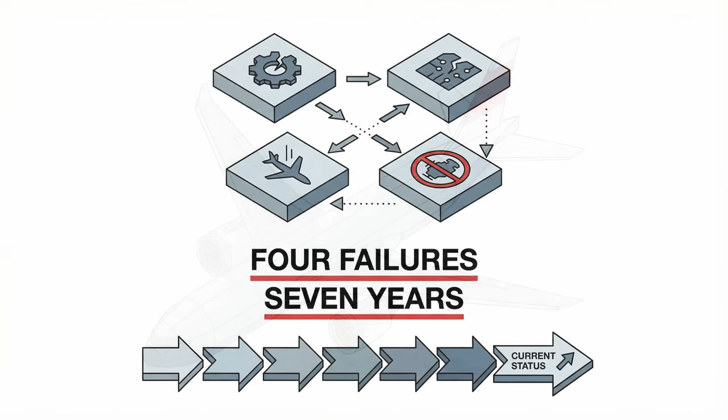Boeing told investors on January 27th that the company just posted a $2 billion annual profit, first time they've been in the black since before the pandemic. Their order backlog hit $682 billion, an all-time record. Kelly Ortberg, the new CEO who took over during Boeing's darkest days, is painting a picture of recovery.

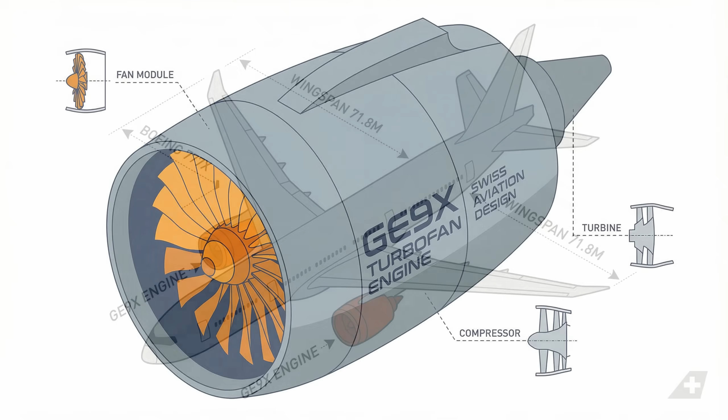Then he gets to the 777X. And you can hear the careful phrasing, the lawyer-approved language that tells you something's wrong before he even finishes the sentence. Quote: 'We have identified a potential durability issue during a recent inspection on the 777-9 engine, and we're working with GE to better understand that issue and finalize root cause and corrective action.' End quote. Potential durability issue.

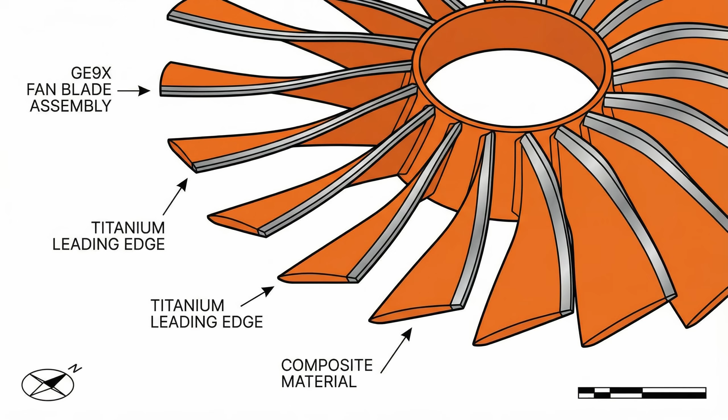That's corporate speak for something broke and we don't know if it's going to keep breaking. According to Flight Global's reporting, this happened during what's called a borescope inspection, essentially sliding a camera through access ports into the running guts of the engine to look for cracks, wear, or metallurgical changes that shouldn't be there. The FAA requires these inspections at specific intervals during certification testing, and this particular engine had racked up significant hours pushing the aircraft through Phase 3 of type inspection authorization.

But Boeing's carefully chosen words are hiding something bigger. Boeing and GE won't specify whether it's the fan blades, the compressor stages, or the turbine section, just a durability issue. GE's official statement reads like damage control: 'We have an on-wing inspection program in place to support Boeing while we analyze the issue and define the corrective action, guided by our safety and quality systems.'

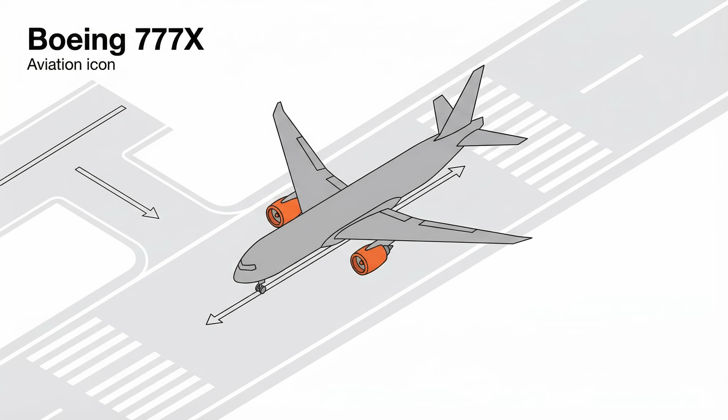This matters because the 777X was supposed to enter service in 2020. That slipped to 2021, then 2023, then 2025, and as of October 2025, Boeing had committed to 2027 deliveries. This latest engine issue doesn't officially delay that timeline. Ortberg insists they're still on track.

But Emirates President Tim Clark, whose airline has 205 of these jets on order, isn't buying it. Clark told Aviation Week he's a little bit miffed that he learned about the delay from a public earnings call rather than a phone call from Boeing. His quote cuts through the corporate spin: 'When they said they pushed it to 2027, that's a 12-month period, am I looking at the first quarter? Second quarter? Third quarter? Fourth quarter? They don't know. They honestly don't.'

And Clark has good reason to be skeptical, because this engine has a history. But here's the part Boeing didn't mention on that earnings call: this isn't the first time the GE9X has had a durability problem. It's not even the second or third. Since development began in 2013, this engine has suffered 4 separate major technical failures.

And when you line them up chronologically, you see something Boeing and GE don't want you to see. Each failure happened after the previous one was supposedly fixed robustly, which means either the world's best aerospace engineers keep missing something fundamental, or this technology is being pushed beyond what current materials science can actually handle.

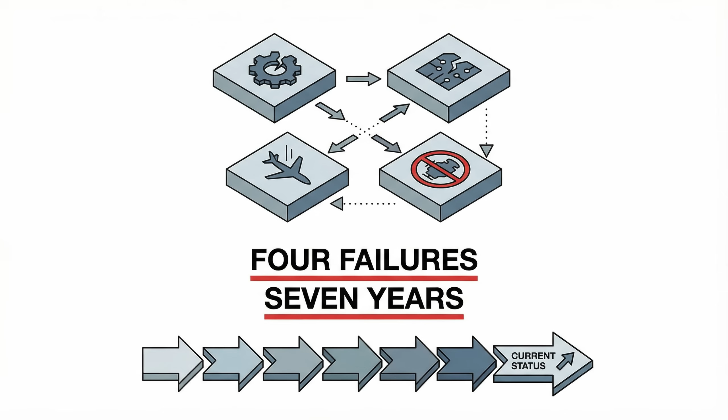The first crisis hit in 2018 and 2019, before the aircraft ever flew. Engineers testing the high-pressure compressor, the section that squeezes incoming air to 50 times atmospheric pressure before combustion, started seeing cracks in the variable stator vanes. These are the adjustable airfoils that control airflow angle into each compressor stage, and they're actuated by lever arms connected to a unison ring that rotates to change their pitch. Under extreme testing conditions, those lever arms started cracking.

The components were deteriorating faster than the engineers had predicted, causing exhaust gas temperatures to spike outside acceptable operating ranges. GE9X program manager Ted Ingling later told reporters, quote, 'It is solved. It is fixed robustly. It is better to have found it in the factory than find it in the field.' That fix pushed the GE9X's first flight from February to March 2018 and delayed the 777X inaugural flight from mid-2019 to January 2020.

But it was caught in testing, corrected with redesigned parts, and the program moved forward. That should have been the lesson learned. It wasn't.

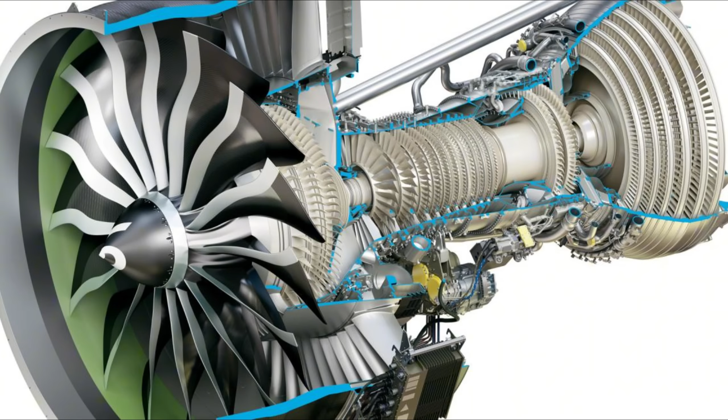Fast forward to October 2022. The 777X test fleet is conducting flights between Seattle and Moses Lake, accumulating hours for certification. Aircraft November 779 X-ray Whiskey lands after a routine sortie, and during post-flight inspection, Boeing technicians noticed something unusual during a borescope check. The engine in question had logged over 1,700 flight hours and 2,600 pressurization cycles, high time for a test engine, but well within expected durability targets.

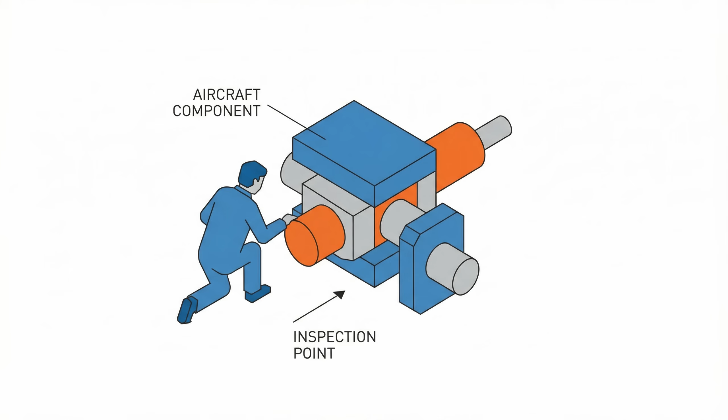Boeing shipped the engine to GE's Peebles, Ohio facility for teardown and additional runs on the test stand. During one of those runs, a temperature sensor triggered an automatic shutdown. The exact cause was never publicly disclosed, but the entire 777X test fleet was grounded for 2 months while engineers inspected every engine and implemented corrective actions. The troubling part? This happened 2 years after the GE9X had received FAA type certification in September 2020.

But what happened in August 2024 made those earlier problems look minor. Aircraft Whiskey Hotel 003 had just completed a 5-hour 31-minute flight from Kona, Hawaii, a long-range ETOPS proving run testing the aircraft's ability to fly extended over water routes. Standard procedure after these flights calls for detailed inspection of all engine mounts and structural attach points.

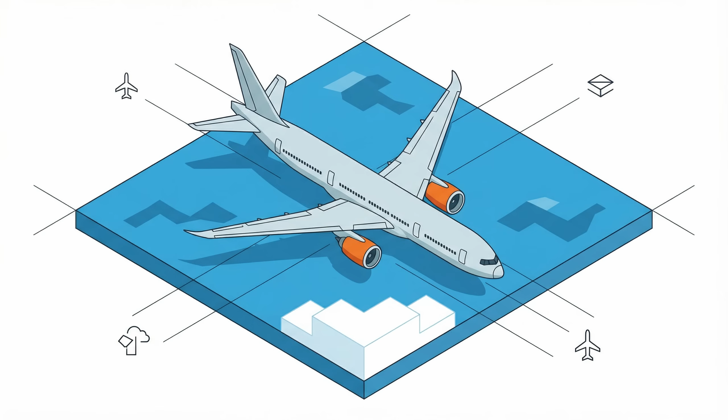What they found was catastrophic. The thrust link, a 13-foot titanium structural beam that transfers all engine thrust loads into the wing box, had completely severed. This isn't a GE engine component. It's part of Boeing's pylon design, the structure that hangs the engine off the wing.

When engineers inspected the other test aircraft, they found cracks propagating on multiple thrust links across the fleet. The 777X was grounded for 5 months. Boeing's investigation determined that vibration-induced stress concentration at the forward engine attach bolt was exceeding design limits. The fix required redesigning the bolt itself and modifying the surrounding pylon structure to redistribute loads.

It's the kind of fundamental structural issue that should have been caught in finite element analysis and ground testing years earlier.

To understand why these repeated failures are so damaging, you need to understand what Boeing promised back in 2013. The 777X launched at the Dubai Air Show with 259 orders worth $95 billion, the largest commercial aircraft launch by dollar value in aviation history. Emirates, Qatar Airways, Etihad, and Lufthansa committed based on 3 key promises.

10 to 12% better fuel efficiency than the 777-300ER, revolutionary folding composite wingtips that would allow the aircraft to fit existing gates, and entry into service by 2020. That 2020 target is now 7 years overdue. Within 7 years, every one of those promises would be broken.

And it's not just the engine. The entire aircraft has been plagued by issues that reveal how difficult modern aerospace development has become.

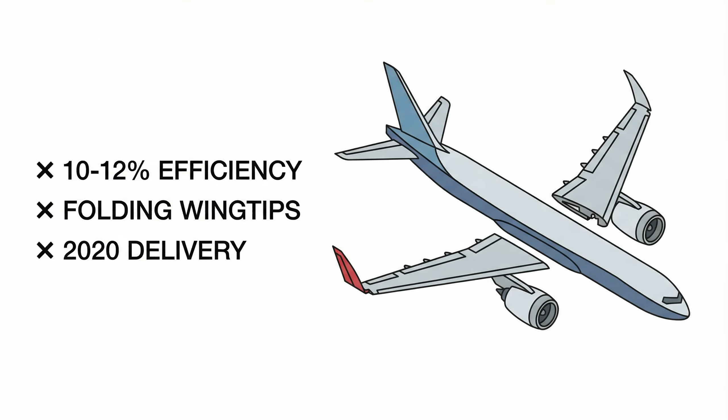December 8, 2020. The 777X is mid-flight during certification testing when the aircraft's nose suddenly pitches violently without pilot input. It's what engineers call an uncommanded pitch event. The flight control system did something the pilots didn't ask for. In the post-737 MAX world, that phrase triggers alarm bells at the FAA.

The investigation revealed issues with how the fly-by-wire flight control software was interpreting sensor inputs during specific flight regimes. Boeing had to tear apart and rebuild chunks of the flight control logic, add redundancy to critical sensor arrays, and revalidate the entire system architecture.

And the FAA had seen enough. By May 2021, the FAA had formally rejected Boeing's request to proceed with type inspection authorization. The agency's language was blunt: design maturity is in question as design changes are ongoing. They warned that realistic certification was at least 2 years away, possibly more.

This reflects the FAA's post-MAX posture. The agency established a dedicated technical advisory board of approximately 16 members to independently examine human factors, airworthiness, and system safety assessments. They reduced delegation authority to Boeing's internal inspectors, meaning FAA personnel now directly evaluate systems that manufacturers use to self-certify. And they implemented an unprecedented 5-phase TIA process instead of the traditional single authorization.

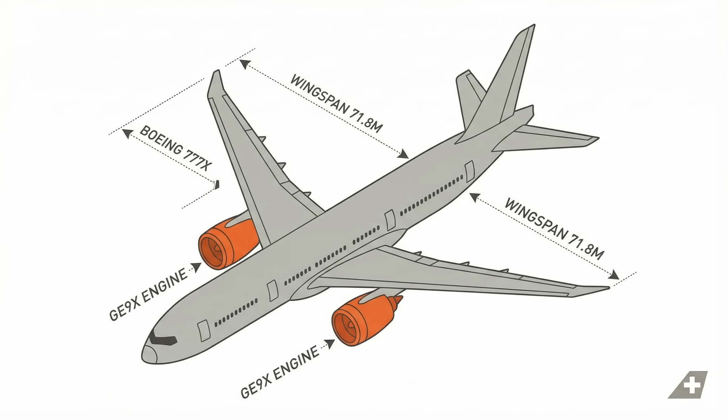As of February 2026, Boeing has completed TIA Phase 1, which covers basic airworthiness and initial flight envelope expansion. They've completed multiple Phase 2 variants covering crosswind landing certification, brake system validation, and community noise testing. They're currently in Phase 3, which evaluates avionics integration, environmental control systems, and auxiliary power unit performance.

Still ahead: lightning strike resilience testing, electromagnetic interference trials that verify the aircraft won't suffer system failures if maintenance crews forget to install a protective panel, extended operation certification for transoceanic routes, and the final FAA conducted evaluations with agency pilots aboard. Boeing has logged over 4,200 flight hours across 1,500-plus flights with 5 test aircraft, but significant hurdles remain. European regulators at EASA have raised additional concerns about flight control system redundancy following lightning strikes.

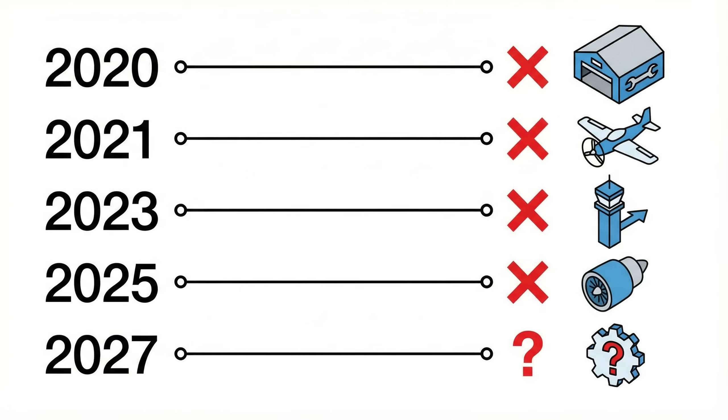Specifically, what happens if a strike damages sensors while the aircraft is already operating with one failed system due to a maintenance lapse? Boeing had to provide detailed responses proving that even when multiple things go wrong at once, the aircraft maintains safe controllability. But even if Boeing clears every regulatory hurdle, there's still the fundamental question nobody wants to ask. Why is the GE9X so hard to get right?

To answer that, you need to understand just how far this engine pushes the boundaries of materials science and thermodynamics. The GE9X produces staggering numbers, 110,000 pounds of certified thrust. Though during testing, GE pushed one engine to 134,300 pounds, setting a world record. The fan diameter is 134 inches. The remarkable part? That massive fan has only 16 blades compared to 22 on the GE90 engine it replaces.

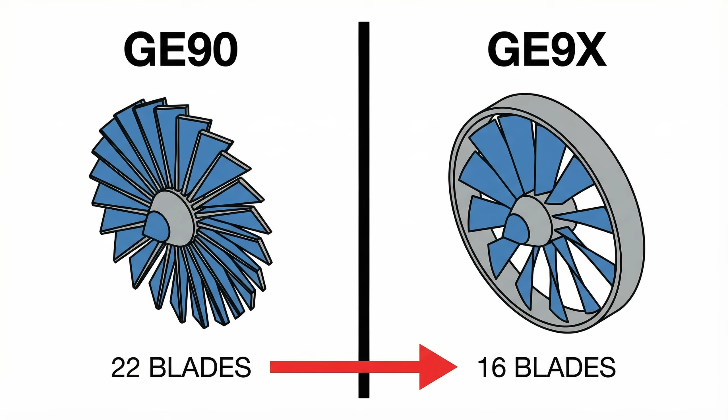Those blades are 4th-generation composites, carbon fiber reinforced polymer with titanium leading edges. Each blade is hollow, manufactured using a resin transfer molding process that was developed specifically for this engine. The weight savings are dramatic. The entire fan assembly is 350 pounds lighter than the GE90's, despite being larger. But the real gamble isn't in the fan. It's in what's burning behind it: ceramic matrix composites.

These are silicon carbide fibers in a silicon carbide matrix, and they represent a fundamental shift in how hot section components are manufactured. Traditional turbine components use nickel-based superalloys that can handle about 2000 degrees Fahrenheit before requiring extensive cooling air. CMCs can operate at 2500 degrees while weighing 1/3 as much. GE threw $1.5 billion at developing CMC technology and built 4 factories just to make these parts.

The GE9X incorporates 107 CMC parts across 5 component types: inner and outer combustor liners, first-stage high-pressure turbine shroud, and first and second-stage HP turbine nozzles. The efficiency gain comes from this. In a traditional engine, you have to bleed off 25 to 30% of the compressed air just to cool the turbine blades so they don't melt. That's air you're not burning for thrust.

CMCs reduce cooling air requirements by 59%, which means more air goes through combustion, which means more thrust per pound of fuel burned. Before the 777X ever flew, GE ran the GE9X through 17,000 hours and 27,000 cycles of testing, the most rigorous pre-service validation in the company's history. 9 test engines specifically for FAA certification accumulated 5,000 hours and 8,000 cycles, including 1,600 dust ingestion cycles and 3,000 ETOPS endurance cycles. GE bet everything that ground testing would catch the problems.

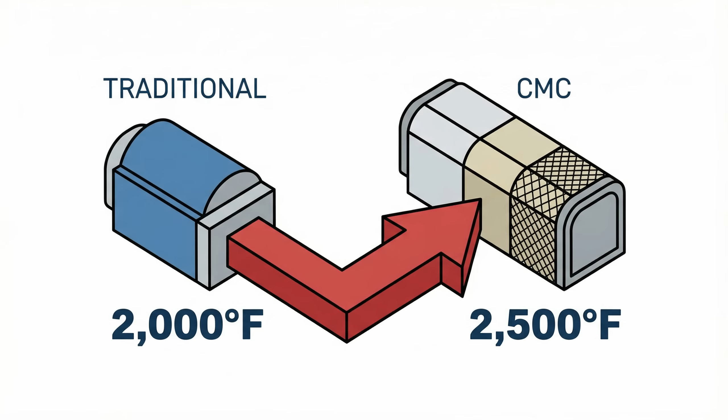History proved them wrong. Ground tests cannot replicate all real-world operating stresses. You can't simulate the exact combination of thermal cycling, vibration, foreign object ingestion, atmospheric conditions, and power setting variations that an engine experiences in actual airline service. Rolls-Royce engineer Dominic Horwood learned this lesson during the Trent 1000 crisis, when intermediate-pressure turbine blades started corroding in service despite passing all certification tests. His assessment was brutally honest, quote, "The issue is how to find such issues on the test bench, how to convince the engine it has been flying for years in, say, Asia."

EASA has since proposed updating certification requirements that in some cases are 60 years old. The European regulator noted that, quote, "Root cause of such failures may have been identified during the engine endurance test if the test conditions and the engine configuration had been more representative." They are now recommending manufacturers include 1 to 2 additional years of maturity testing in development programs.

For the airlines waiting for their 777X orders, Boeing's delays aren't just inconvenient. They're forcing multi-billion-dollar fleet adjustments that ripple through route planning, crew training, and customer experience strategies. Emirates holds 270 aircraft on order after adding 65 more at the November 2025 Dubai Air Show, a $38 billion commitment. President Tim Clark has been the most vocal about his frustration, and his comments reveal the operational chaos these delays create.

Clark's assessment of the 2027 timeline carries weary skepticism. Quote, "The aircraft is over 5 years late and, if it continues to be late, our patience will be truly tested. We have an aging fleet, which needs to be replaced." Emirates' response has been a $5 billion retrofit program for 191 existing Boeing 777s and Airbus A380s, installing premium economy cabins and upgrading business class products that were supposed to debut on the 777X. They've also ordered 65 A350-900s to fill the capacity gap.

Lufthansa faces similar challenges. The German carrier was designated as launch customer for the first 777X delivery, and they'd planned to debut their new Allegris business class product on the aircraft. Instead, they've retrofitted Allegris onto existing 787s and A350s. Meanwhile, they're still operating quarter-century-old 747-400s and A340s on routes that were supposed to transition to 777X in 2021. And the financial damage goes far beyond just one airline. Boeing has accumulated over $15 billion in pre-tax charges on the 777X program.

$6.5 billion in 2020 when certification first slipped significantly, $4.9 billion in Q3 2025 when delivery moved to 2027, plus additional charges for extended development, supply chain disruptions, and customer compensation. CEO Ortberg's explanation reveals just how precarious the economics have become.

Quote, "Even a minor schedule delay on the 777X program has a pretty big financial impact because we're in a reach-forward loss situation." Translation: the program has lost so much money that Boeing can't recover development costs across the first 500 aircraft built. GE Aerospace faces its own exposure.

The company has invested over $2 billion in GE9X development plus $600 million in supply chain infrastructure and $1 billion in MRO facilities, including a new Dubai South Service Center opening in 2027. With 700-plus engines on order worth approximately $28 billion at list prices, the stakes extend decades into the future.

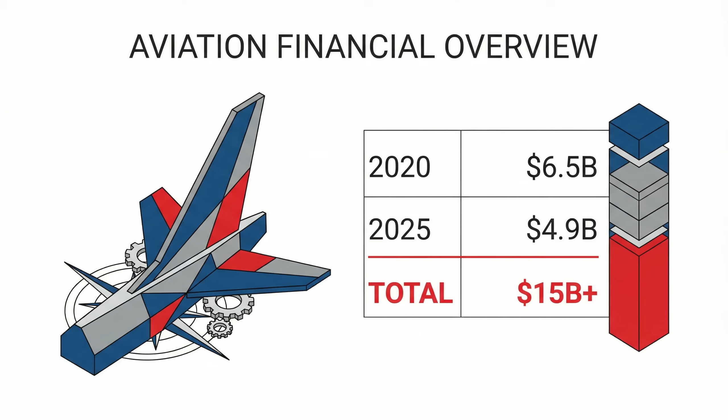The competitive implications favor Airbus in the near term. The A350-1000, the 777X's direct competitor, has been in service since 2018 with 103 aircraft operational and proven 99.3% dispatch reliability. As aviation consultant IBA Group noted, quote, "As the 777X program continues to be affected by delays, Airbus' competing A350-1000 product has gained some market share."

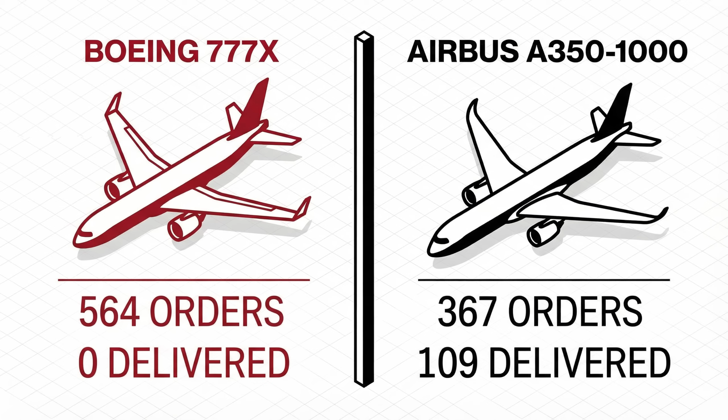Yet Boeing maintains a larger wide-body order book, 418 orders in 2025 versus Airbus's 201, and Emirates' continued commitment signals confidence in the ultimate product, which raises the uncomfortable question, has this happened before? If there's any consolation, it's that the GE9X's troubles fit a well-established pattern in aerospace development. Next-generation engines pushing thermal and pressure limits have always encountered durability trade-offs.

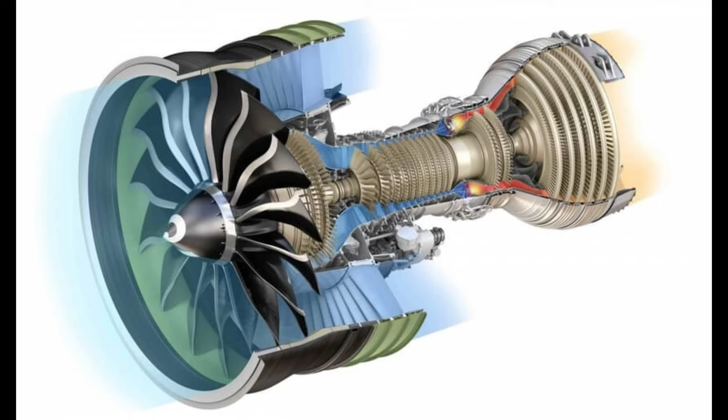Pratt & Whitney's PW1000G geared turbofan faced powder metal contamination in high-pressure turbine components that required inspection of 1,200 engines over 3+ years. Rolls-Royce's Trent 1000 suffered blade corrosion and cracking across 500 engines, taking 4 years and £2.4 billion to fully resolve. Even the legendary GE90, the GE9X's direct predecessor, and the engine that powers most of the world's ultra-long-haul flights, nearly died in development.

GE CEO Jack Welch famously wrote an internal memo stating, quote, "The GE90 is dead, put a stake through its heart." He wanted to cancel the entire program. Engineers convinced him to give them one more chance, redesign critical components, and the GE90 went on to become GE's most profitable long-range engine.

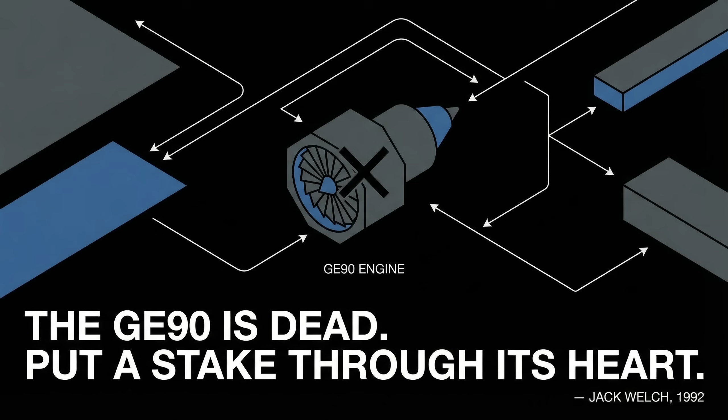Industry consensus holds that modern engines will never match the legendary durability of older power plants like the CFM56, which routinely achieved 30,000+ cycles on wing. The CFM LEAP, its successor, sees some operators pulling engines off the wing for overhaul every 3,000 cycles in harsh operating environments. That's the trade-off for 15% better fuel efficiency.

So, where does this leave the 777X and the GE9X? Boeing has built 26 airframes total, 4 actively flying in the test program and 22 sitting in storage at Paine Field awaiting certification. GE continues producing engines at its Evendale, Ohio facility, with approximately 60 power plants in various stages of assembly. The remaining certification milestones are defined.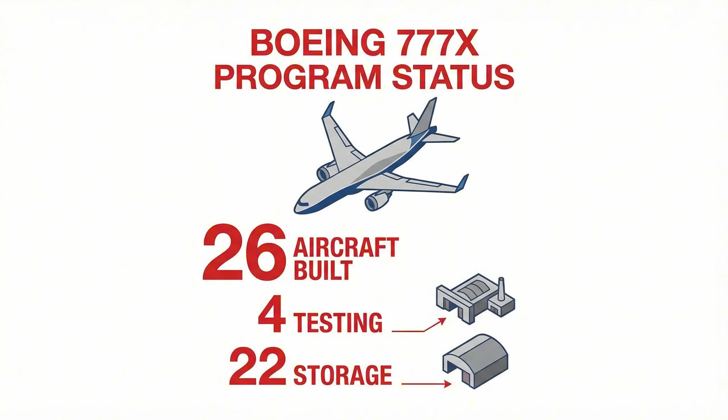Complete TIA Phase 3, obtain Phase 4 and 5 approvals, finish lightning strike and electromagnetic interference testing, complete ETOPS validation flights, and pass final FAA evaluations with agency pilots aboard. Boeing insists the 2027 delivery target will hold despite this latest durability issue. Whether that's realistic depends on answers Boeing and GE haven't provided yet.

Is this January 2026 durability issue a batch manufacturing defect affecting a limited number of components? Or does it represent a fundamental design flaw requiring architecture changes? Can it be fixed with an on-wing inspection program and selective part replacement? Or does it demand engine teardowns and component redesign? Tim Clark's assessment cuts through the corporate optimism, quote, "When they said they pushed it to 2027, that's a 12-month period. They don't know. They honestly don't."

History suggests the GE9X will ultimately mature into a reliable workhorse. The GE90 recovered from near cancellation. The Trent 1000 achieved zero aircraft on ground after 4 years of remediation. The PW1000G is approaching resolution with its GTF Advantage variant. The question isn't whether the 777X will fly passengers, it will.

The question is whether Boeing can execute what CEO Kelly Ortberg calls a mountain of work, without additional financial charges that strain an already precarious balance sheet, and whether 7 years of delays have eroded customer confidence beyond repair. Airlines with 565+ aircraft on order haven't defected. Emirates just added 65 more to its commitment.